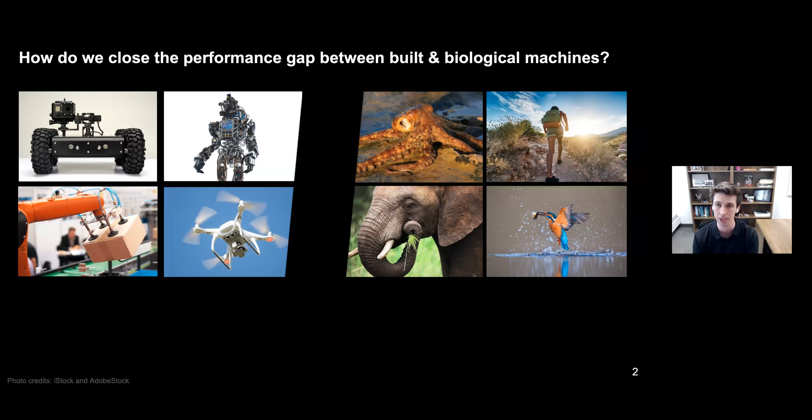If we could figure out ways of closing this performance gap, we think that we would tap into some pretty unprecedented opportunities for solving key societal and global challenges by having autonomous agents be deployable in the real world. Now, historically, there have been a number of approaches robotics has taken to try to bridge this performance gap.

We've seen really interesting and exciting opportunities in bio-inspired robotic systems and swarm robots, even thinking about going at unprecedentedly new length scales and even biohybrid designs. But we are particularly interested in this space of soft robotics, something that originally got its origins as material robotics, which places the emphasis on closing this gap not through computational advances, but rather material ones.

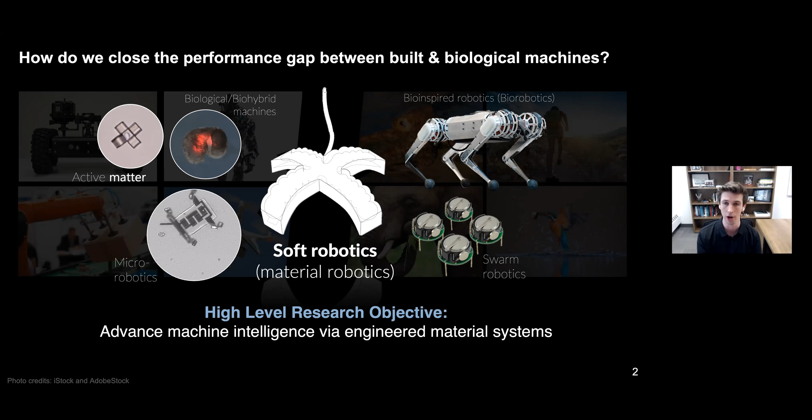I really want to drive home that our overarching research objective is rooted in material science and engineering. We do think that closing that performance gap is going to require not just computational advances, but truly materials-driven ones.

Soft robotics in many ways is bringing soft materials into the robotics design mix to appeal to a side of machine intelligence that historically has been ignored by robotics engineers. Most of robotics has been predicated on the fact that we need to think about advancing intelligence computationally, thinking about algorithmic development, thinking about control strategies, because robots have historically been systems based on motorized mechanisms.

But nature does teach us that there is something physical to intelligence. There is a role for the body, not just the brain, to play in our general sense of autonomy and intelligence. I really, truly want to emphasize that these are not new ideas.

These have been explored by phenomenal leaders. Many people on the panel know and have worked with Professor Pfeifer, who has done phenomenal work in trying to help us understand the importance of both sides of machine intelligence. But I do just want to iterate that I think this is what soft robotics aims to do.

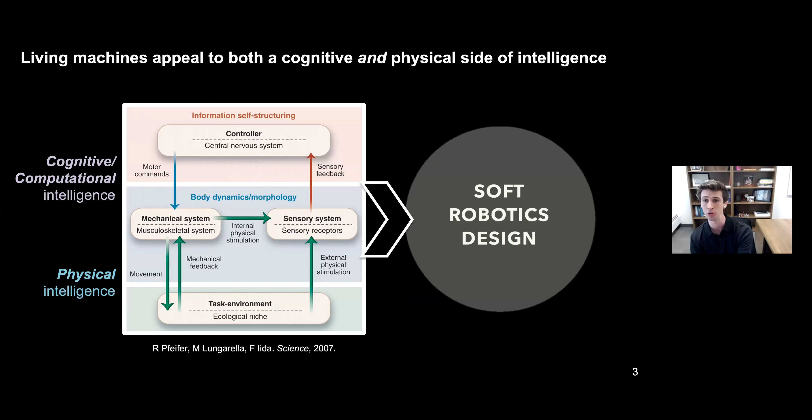I also want to drive home a point today that I don't think we do this very well at all. In fact, I want to make the argument today that we are so laser focused on just the physical appeals to intelligence in how we create new types of soft actuators or use these systems.

If you think about soft robotics, we are kind of focused on using fluidics or dielectric elastomer actuators to enable these types of physically intelligent machines. But the requirements for actually actuating these systems are not very compatible with the controllers and the power supplies and the sensors that are ultimately required to still give this robot a kind of brain.

In effect, I think in soft robotics many of our challenges stem from the fact that we have so focused on trying to create better soft robot bodies that we forgot to give those bodies brains — the types of controllers, sensors, and practical power approaches that are actually needed to create these machines.

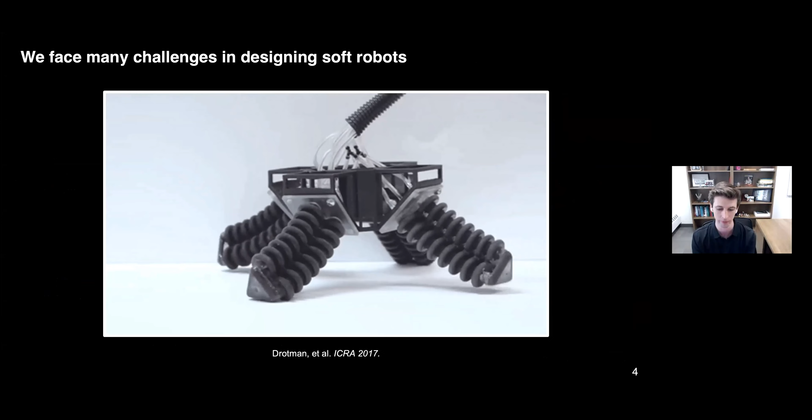You can literally see this disconnect, this lack of bridge between the physical and computational in soft robot design. This is wonderful work — I love this robot from Mike Tolley at the University of California, San Diego, where they clearly show us these beautiful bio-inspired actuation modes, but these actuators can't bear the payload of the hardware needed to actually power them.

We manufacture these systems in such a way that it kind of complicates how we might sensorize the bodies. We don't have sensors, we don't have good control strategies, we have tethers. I think many of these things very much highlight the fact that we're not doing a good job of creating physically and computationally intelligent soft machines.

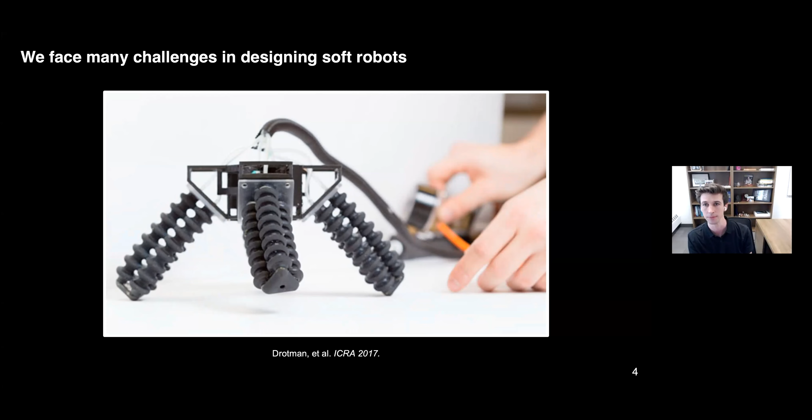To that end, our group is focused on this idea of how do we not just design soft materials for new actuators, how do we not just design soft materials for soft sensors, but how do we actually think about bringing together actuation, power, perception, and control capabilities into single material systems?

Because at the end of the day, all of these functionalities are kind of inextricably linked. And if I'm not thinking about all of these at the forefront of soft robotic design, I'm going to run into this trap of not creating a machine that appeals to both of these equally important sides of machine intelligence.

And so we imagine creating material systems that specifically work to enable these integrated multifunctionalities. Importantly, this is going to require us to take a new lens to science and engineering of robotic materials.

We are going to have to focus on new ways of processing for these integrated functionalities, because those integrated functionalities are critical for really helping us explore not only the closing of the performance gap, but practical applications for soft machines. If you're interested in reading more about how we've been thinking about this, I want to shamelessly plug a perspective piece we published last fall in Accounts of Materials Research.

The editorial board was kind enough to feature us on their front cover for that issue. In many respects, we have been thinking about robotic materials, and I want to make the case that this little system I made called the Octobot is, in a sense, our very first robotic material. This machine, called the Octobot, is something I designed in very close collaboration with my colleague Mike Wehner, who's now a professor at the University of Wisconsin-Madison, when we were in Professor Robert Wood and Jennifer Lewis's groups at Harvard University.

The general idea of this system was to think about replacing hardware by turning to a chemical fuel instead of rigid power supplies, and turning to microfluidic logic-based controllers as opposed to rigid computers. What we were able to achieve was the selective decomposition of liquid hydrogen peroxide fuel within 3D printed catalysts that would produce a gas we could use for actuation. In many ways this is an underwhelming machine, but by architecting the geometry of the plumbing within this elastomeric composite, we are able to showcase a composite that integrates actuation, power, and control simplistically within a single composite.

Many groups are now working on thinking about fluidic sensing in these types of systems. I want to hint today at where we are actually going forward, inspired by the Octobot as a first artifact of a robotic material.

Specifically in my group, we think that the best way of bringing together all of these important robotic capabilities is through returning to electronically integrated approaches to how we think about actuation, control, sensing, and also power. This motivates why we think electronic integration is the way of the future in this space, as opposed to something like pure fluidic integration approaches.

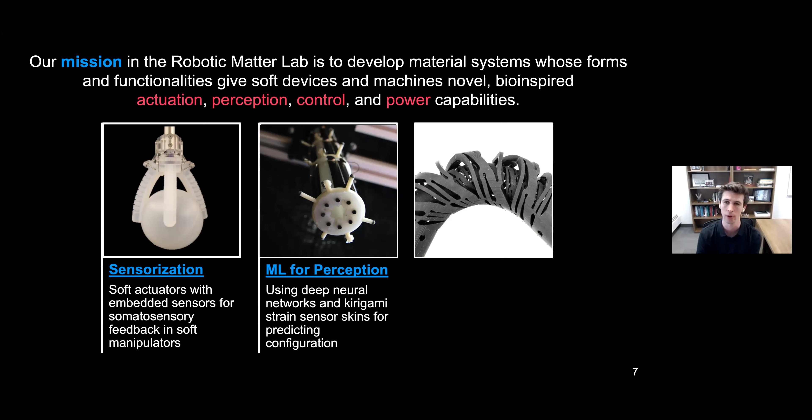I want to talk a little today about how we have thought about sensorizing soft robots, specifically creating new types of sensorized soft actuators. Control in soft robotics is incredibly hard, not only because of the challenges of sensorizing soft robot bodies, but at the end of the day, what do you actually do in a feedback context? How do I actually control a very difficult to control system? I'll talk a little bit about how we hope to bridge that gap with machine learning.

Finally, I want to tease something of huge interest to our group right now at Northwestern, and that is thinking about returning to electric actuation, not through high electric fields or thermomechanical response, but literally creating new types of architected materials that would allow us to return to the use of conventional, robust, easy to access servo motors. So I first want to dive into this sensorization side.

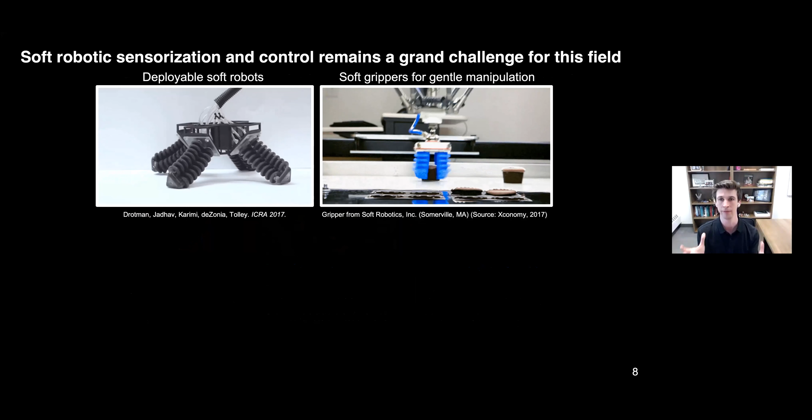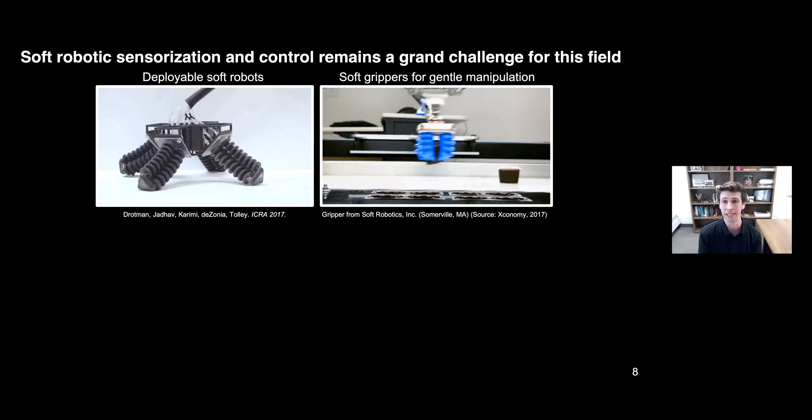Again, in this idea of appealing to physical intelligence, working towards pneumatic actuators or dielectric elastomer actuators, we've created materials and manufacturing methods that make it difficult to easily sensorize these robots. Most soft robots that you see actually don't have any sort of integrated sensors, and we don't have good closed loop control strategies for these robots.

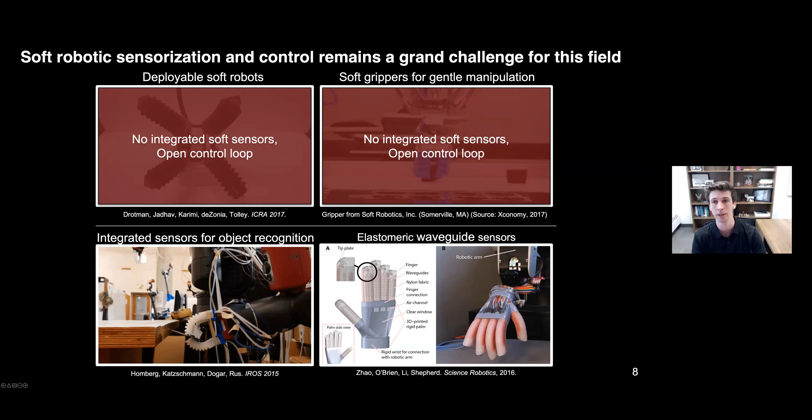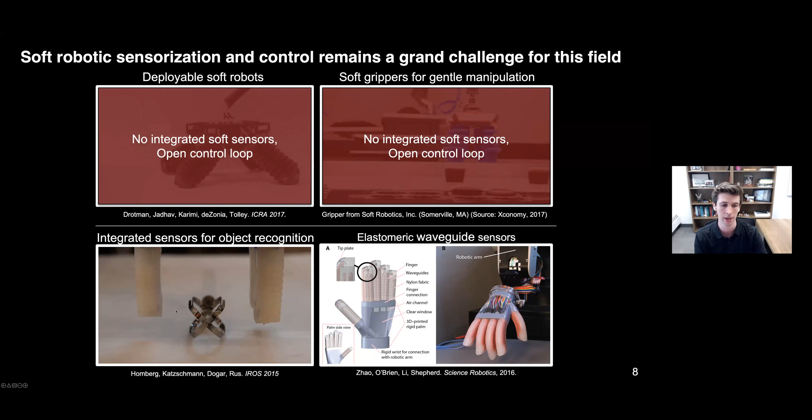When we started this work, some of the prevailing strategies were to figure out ways of carefully molding off-the-shelf flexible bend sensors within the neutral axis of pneumatically actuated fingers. This is work from MIT, from a former colleague of mine, Robert Katzschmann, and my postdoc advisor, Daniela Rus, where they were able to hold objects and in a preliminary way predict or recognize what object was in the soft hand's grasp. I'll talk later about some other sensing approaches.

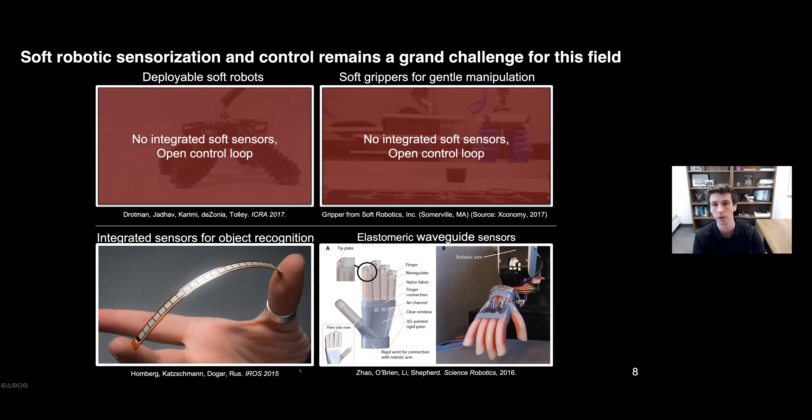I do want to give a highlight to Professor Robert Shepherd's group and the incredible work they're doing with elastomeric waveguides as sensors. The idea here is to sensorize soft actuators by putting in stretchable waveguides that allow us to translate optical power losses during their deformation into modes of sensory feedback.

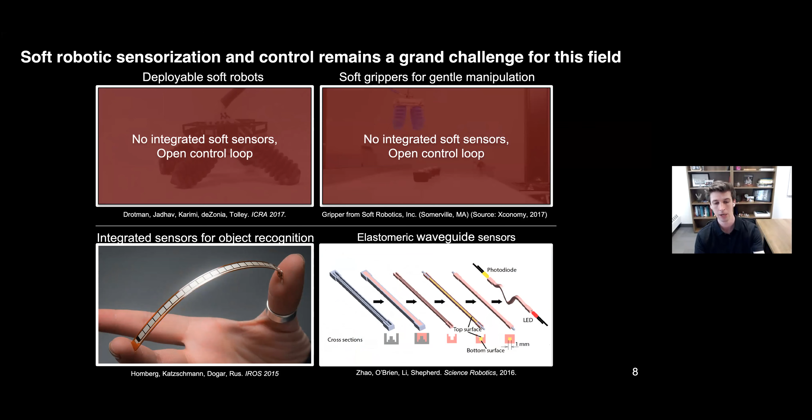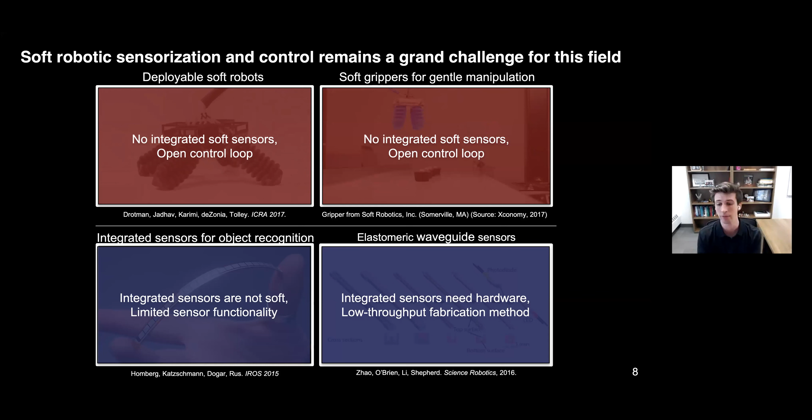The big takeaway I want to emphasize is that in some instances these types of sensors aren't exactly soft. Bend sensors can bend, but they're not stretchable. It's difficult to design these systems easily when you have to manually assemble or manually mold and place them into actuators, resulting in limited design flexibility, limited softness, and ultimately limited functionality.

We made the Octobot with a technique called embedded three-dimensional printing, which I'll talk more about in a few slides. As we worked on Octobot and recognized the opportunity of freely patterning different functional materials within the body of an agent, we wanted to work towards a system that wouldn't be limited in how we might bring specialized functional sensing networks into soft robots.

Specifically, we wanted ways of sensorizing soft robots that would let us explore how an agent might have proprioception, specialized forms of touch, or even pain or temperature sensing capabilities. We didn't want to be limited in the somatosensory capabilities we could explore, so we set out to create systems we call SSAs, or soft somatosensitive actuators.

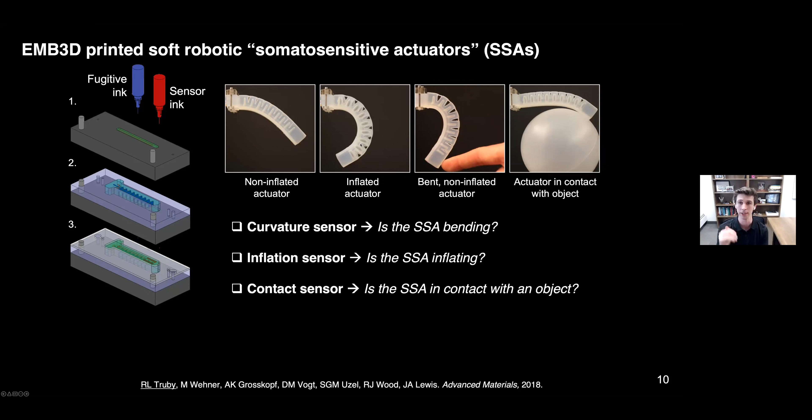I also wanted to know whether this was intentionally inflating. I can inflate the actuator to get bending, but I can also manually bend it to get bending, so it's important to sense if that was intentional. We also want these objects interacting with the real world, so sensing contact was very important too. We set out to introduce within this printed soft somatosensitive actuator at minimum three different types of sensors: curvature, inflation, and contact sensors.

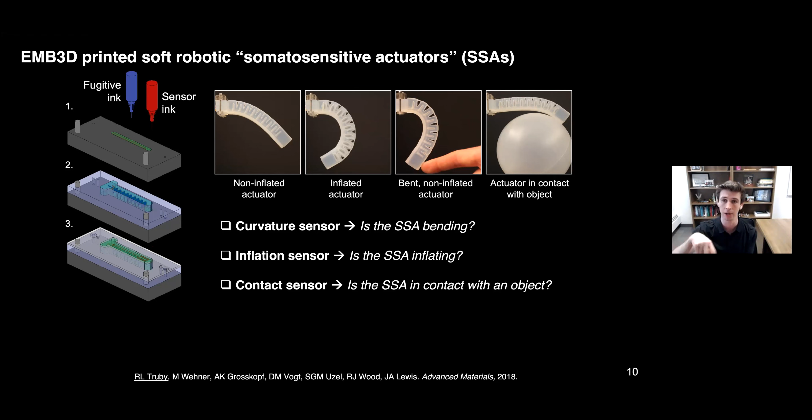I'll talk more about embedded printing with a short video clip. The premise is I have some mold, and within that mold I fill an uncross-linked silicone, rheologically tailored fluid called a matrix material, which lets me freely print different traces of inks to give functional parts. For this work we use a mold assembly: take one layer, pour matrix material in, print whatever's in that layer, then add a new matrix material and mold layer, pour that in, print, and continue the process.

For this work we use two functional inks. First, a fugitive ink—these are ubiquitous in Professor Jennifer Lewis's group, aqueous gels based on a class of polymers called pluronics. We use this to template out our actuation networks. But really what we needed to do was figure out how to 3D print the sensing ink, which is the red ink you see here.

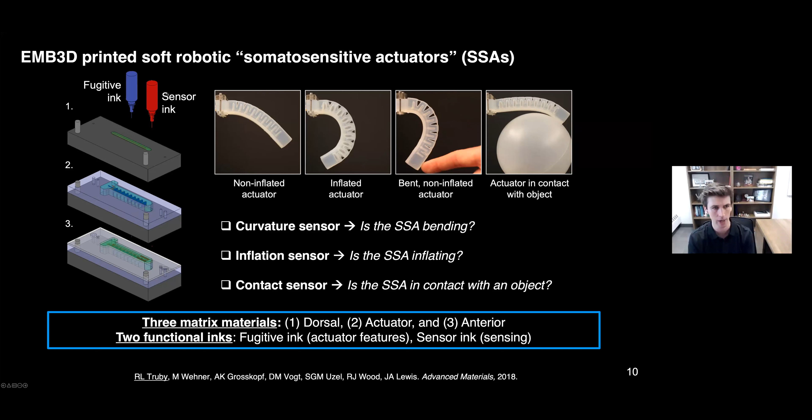I don't have time to go into all the trade-offs of making a better soft sensor—soft sensors are difficult to create—but we turned to printing sensors based on ionic liquids, naturally ionically conductive fluids. We started working with this organic ionic liquid, a molten salt at room temperature called 1-ethyl-3-methylimidazolium ethyl sulfate.

Anytime we're 3D printing, we need to rheologically tailor the ink to facilitate the printing process—we need shear thinning, viscoelastic behavior. We found the easy way to do this was to take fumed silica, a very cheap rheological modifier, add it to our ionic liquid, and get these really nice shear thinning fluids.

Fortunately for us, this had been done before—people had looked at solid and gel electrolytes, seeing what happens when you put a nanoparticle into an ionic liquid and get these nice gels. This was probably the easiest ink I had to make during my PhD: literally taking fumed silica and adding it to an ionic liquid to get this high performance, soft, ionically conductive sensor.

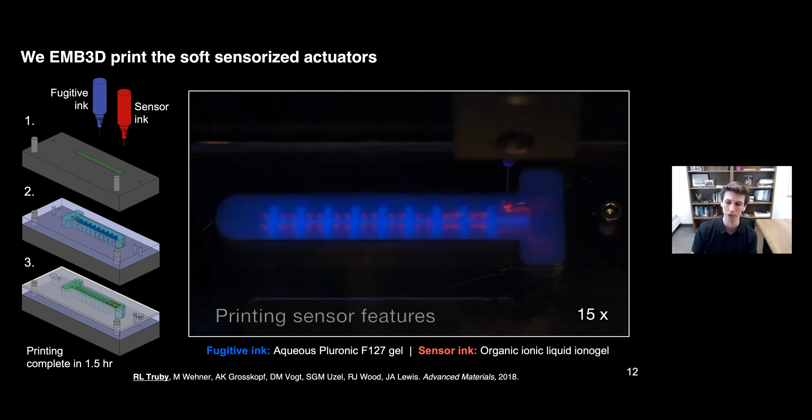This quick video will show you a bit about the process. The entire process takes about 90 minutes, but this is us printing the pluronic ink within that actuator matrix. We'll then put that third layer on, our third matrix material, and this is that sensor ink being printed. Again, all of this is uncross-linked, and we print in a free-form way. Once printing is done, we throw this in the oven and we're left with structures that look like this.

The fugitive ink can be removed by just refrigerating the actuator and pulling that ink out by vacuum. But in short, what we have here is in 90 minutes, an opportunity to create a 5-material construct that would be very difficult to do with any existing method. We achieve this by using the mold to globally program form, and then we print 2 different inks to give all the different functional features we need.

In this particular picture you see on top, this is the curvature sensor running along the top or dorsal side of that actuator. The blue features are again that pluronic ink, which form my actuation network. You can see the inflation sensor weaving right around that set of actuation bladders. And if I turn the tip over and show you the underside, you'd see this contact sensor meander, which is where we make contact with objects.

We can tune the mechanical properties of each matrix material, and we can terminate all the leads and inlets for our sensors and actuation network within this tougher actuator matrix that you see here.

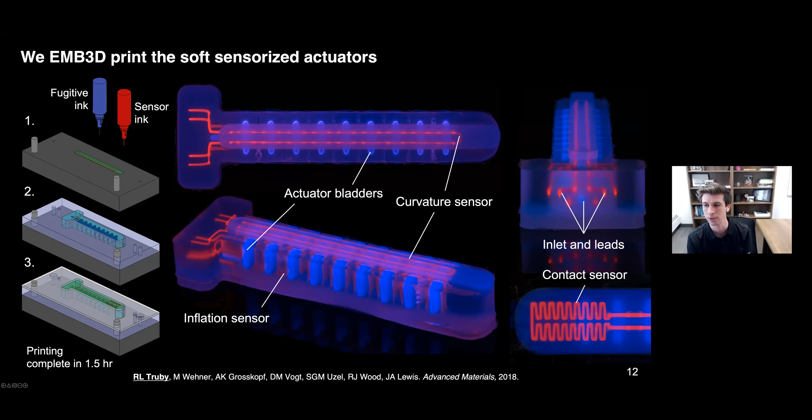I want to quickly walk through how these sensors actually perform. To do that, I'll give you this simplified view of these actuators. All the inflation, curvature, and contact sensors are resistive sensors. The inflation sensor is shown here in green in the actuated state, and on the bottom in the unactuated state. That inflation sensor weaves around the inflation bladders, or actuator bladders, so as I inflate or increase internal pressure, I compress my inflation sensor and get a resistance increase.

The curvature sensor lies on top of the device, so as I inflate, I bend and get a resistance increase. Similarly, on the bottom side where I have my contact sensor, if I apply contact pressure, I collapse cross-sectional area and get a resistance increase.

Fortunately, that's exactly what we saw. These were designs that we intended and were able to see in our characterization of free and block displacement of these actuators. On plot A here, we're taking that actuator and just allowing it to inflate without hitting an object. You can see a nice resistance change with inflation pressure from our blue curvature sensor, a nonlinear response from the inflation sensor, and no real big resistance change from that contact sensor.

Now, if I change the study by having some rigid obstruction and freely inflate against it, I'm going to constrain bending, so I don't get as pronounced a response from my blue curvature sensor. The green inflation sensor is pretty much the same, and that orange contact sensor begins to show clear resistance changes. In these block displacement studies, we're not guaranteeing pure intimate contact with that meander, as shown in this illustration, but if I directly push on that meander, I get very large resistance changes from that contact sensor.

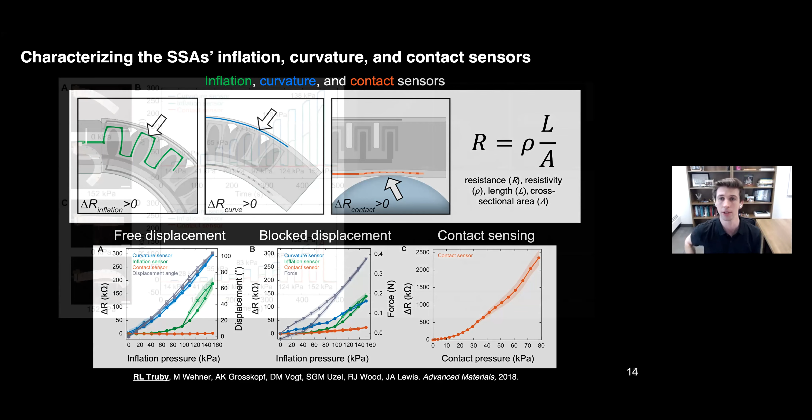Really interesting was when we'd flick and perturb the system. You could literally sense that damped harmonic response as it would go back to its steady state. In this paper, in the SI, we have these beautiful curves showing the high resolution of that sensing. That's something you simply wouldn't achieve with other types of soft sensors that are hysteretic or time varying.

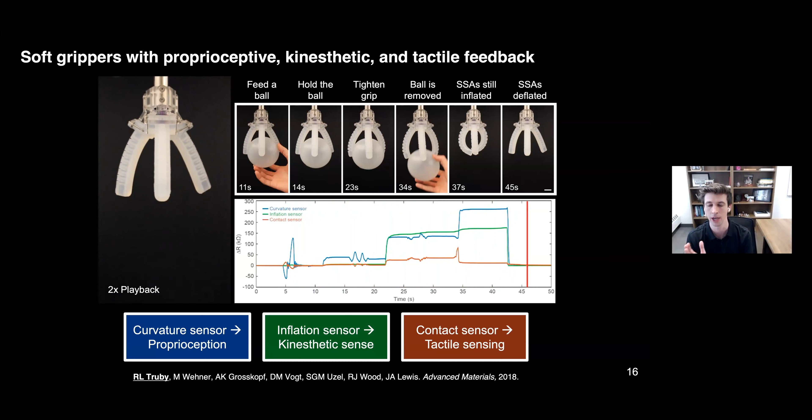This video shows you a little bit about how these curvature, inflation, and contact sensors can give rise to bio-inspired ways of proprioceptive, kinesthetic, and tactile sensing. This is just me interacting with the gripper, holding a ball. Importantly, when I fully deflate this actuator at the end of the study, more or less all of those sensors go back to their original resistance value. That kind of robust, reliable performance is really critical for thinking about control.

So when I moved to MIT, I really wanted to close the control loop on a very simple gripper. I wanted to create algorithms that would allow us to autonomously grab objects with these grippers.

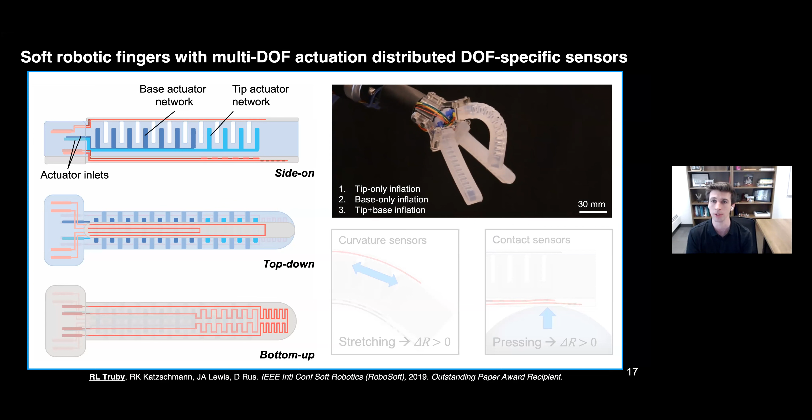One of the really cool things about embedded printing is, of course, if I want to change the general shape, I have to change the mold, but otherwise I just change the G-code and the path planning for my actuator and sensor inks. So instead of just one actuation network, I could have two different actuating networks, which would allow me to selectively actuate either the tip or the base of my finger. This is something that's kind of hard to do when I take a pure molding approach to creating pneumatic actuators.

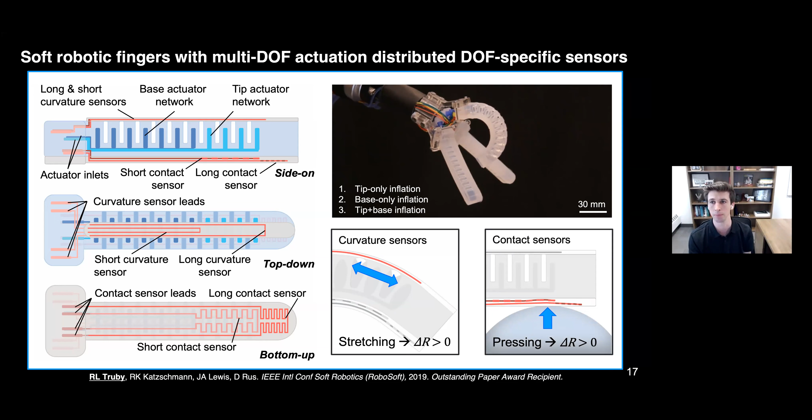What was really exciting about this was I could also create regionally specific curvature sensors. So I put one curvature sensor called the short curvature sensor spanning along the base actuator, and I could have a long curvature sensor that spanned the entire length. I could similarly create short and long contact sensors. In short, I could create multiple degrees of freedom of actuation, and each of those degrees of freedom had its own curvature and contact sensor—so truly distributed proprioceptive and tactile sensing.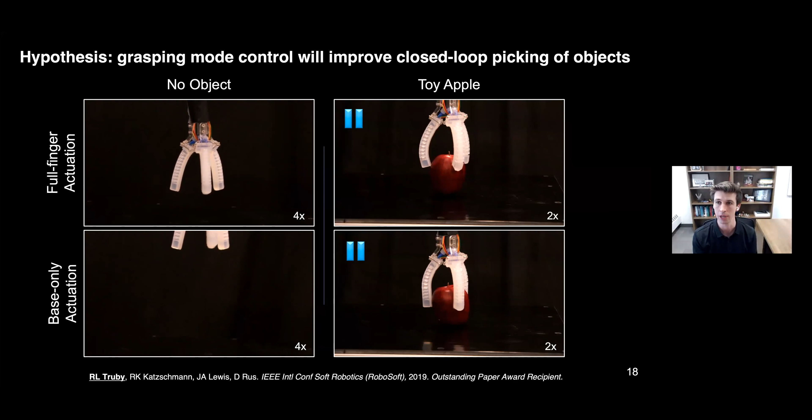I don't do anything—the algorithm naturally positions the hand further down the object, so that when the algorithm tries to initiate a grasp, it has autonomously postured its hand further down the object, giving me a more successful lift up. And so without changing anything, I can look at this with a bunch of different objects.

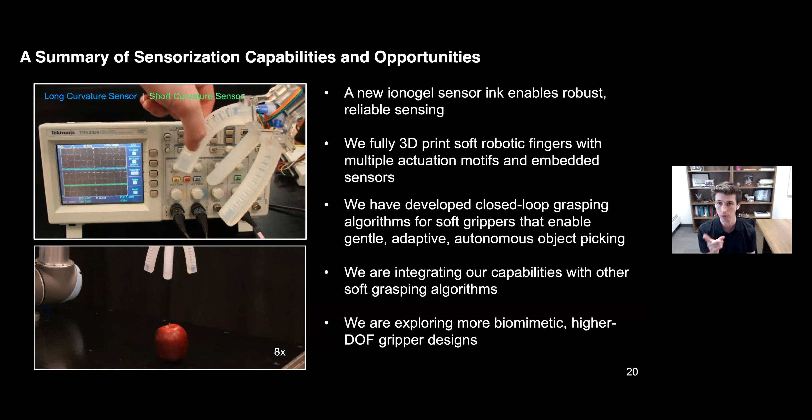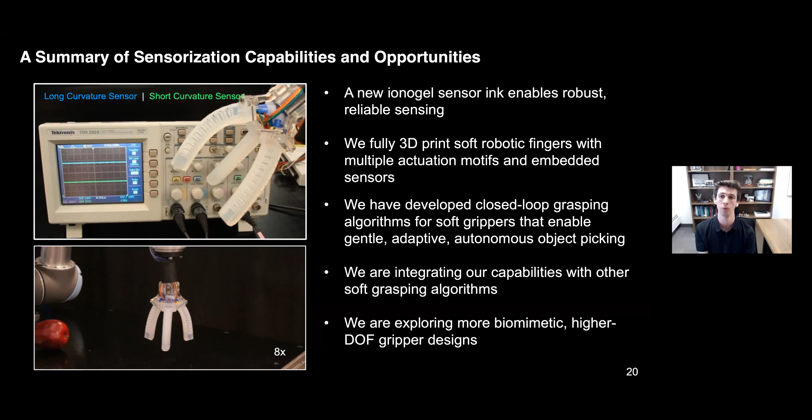So in short, I wanted to show you this because we're looking at new ways of sensorizing soft actuators that are fully 3D printed. We have now created 2 degrees of freedom in actuation with 4 distributed sensors in one 90-minute print session. We've developed some basic algorithms for autonomously feeling for and posturing our hand around objects before grasping them. In short, we now have a lot of opportunities to think about how to better control these things, how to think about more bio-inspired actuation, and a whole lot more.

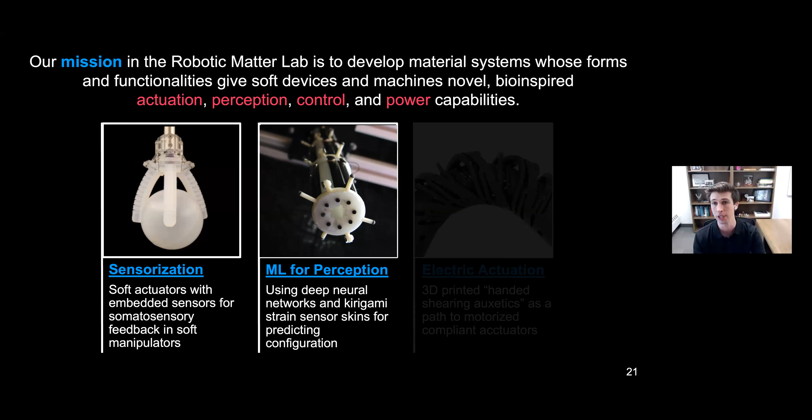These types of algorithms are great. They're simple, and they allow us to do really cool things. But in the context of more robust control, what we're realizing is that we have to turn more and more to machine learning. And the reason we're turning to machine learning is that model-based control of soft robots is incredibly difficult.

To me, this is one of the coolest soft robots out there. This is work from former colleagues of mine, Robert Katzschmann and Cosimo Della Santina. This is an elephant trunk inspired arm—a 3-segment arm where each segment has 4 pneumatic actuators. They developed this very complex model-based approach for dynamically controlling the motion of this arm.

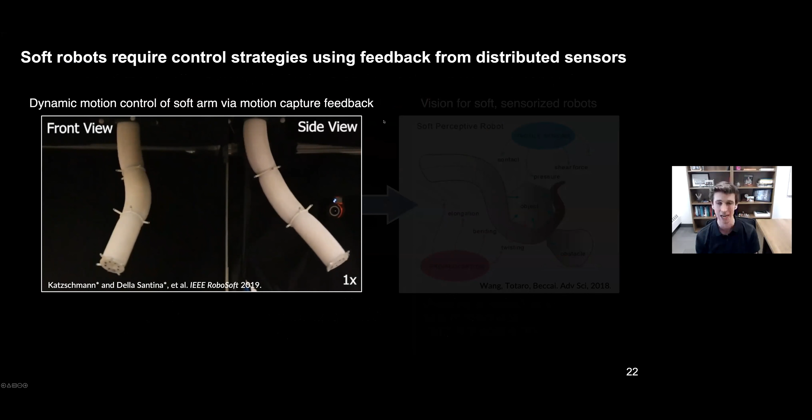But unfortunately, that arm actually has no sensors in it at all. It's using motion capture, which is a kind of exogenous vision-based sensing strategy. As soon as I want to ask this to work in the real world, it's going to say, well, where's my camera showing me how I'm moving? If you want to actually robustly control a robot, we need to figure out right now how to integrate specific tactile and proprioceptive sensors within these bodies, so that our control strategies aren't using motion capture.

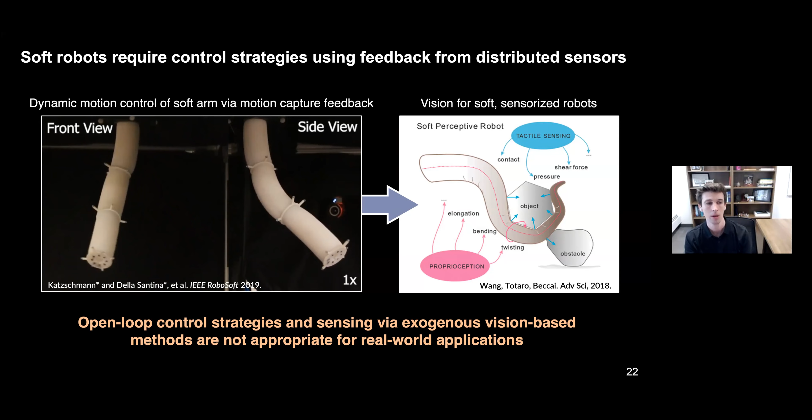They are working with the distributed sensors that we could provide these bodies. Machine learning has a critical role in helping us understand how to make sense of these sensors.

We've seen really awesome work on how machine learning could help us predict something about the deformation mode of soft actuators that are sensorized with liquid metals. Rob Shepherd's group, again, doing really interesting work predicting shape change of non-actuating structures with their optical waveguides. And then again, really great work coming out of UCSD and Mike Tolley's lab, where they're taking piezoresistive sensors and recurrent neural networks, specifically LSTMs, to predict tip position and force in bending actuators.

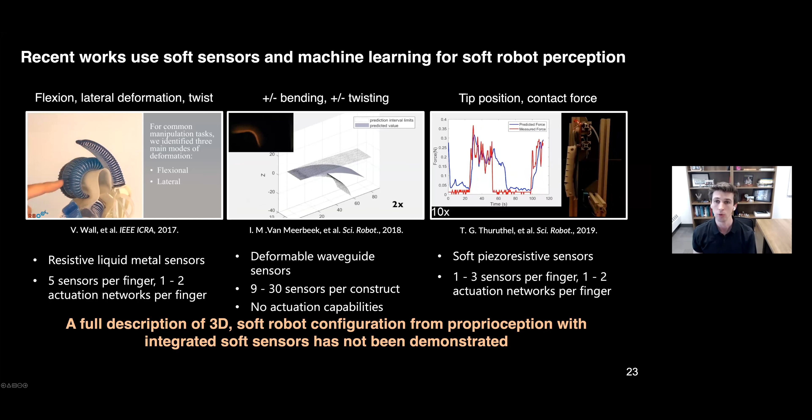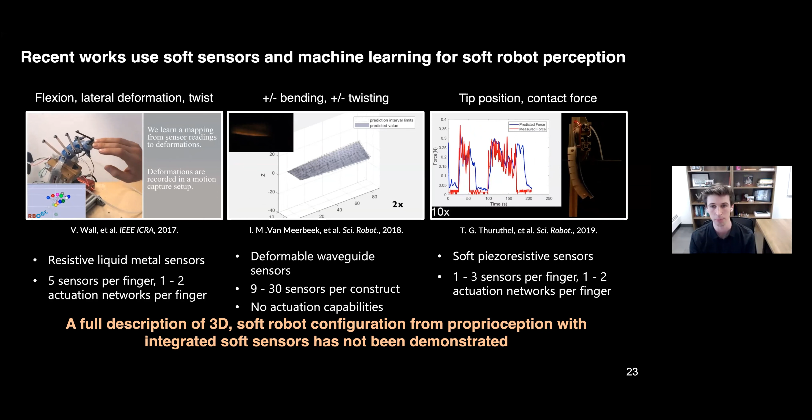In short, we still don't have the ability to predict the full configuration of a soft robot if we want to do that type of dynamic motion control that I showed previously. And while there has been a lot of work in this space, this is still kind of a key missing need, and something that we were very much inspired by.

So we took this same arm and decided, well, let's figure out a way of easily sensorizing it. It's very difficult, as I hopefully alluded to in the previous part, to sensorize very complex robots.

We had this very complex elephant trunk inspired arm, and we needed a very easy way of sensorizing it. So I'll talk about how we do that with Kirigami and off-the-shelf sensors. These sensors are going to be inputs to neural networks, and using motion capture data as ground truth, we train these neural networks to take sensory inputs from these sensor skins and convert it to a prediction of configuration. I'll talk a little about this pipeline and the challenges we face.

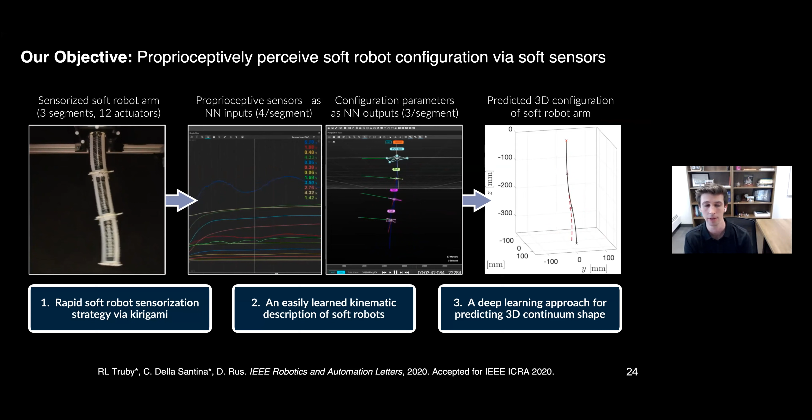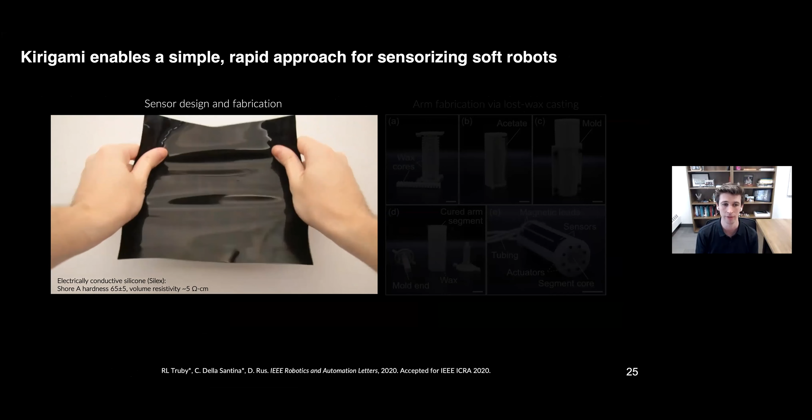I showed you previously this very complex 3D printing method to sensorize soft robots, but an arm like this is really difficult to 3D print. It's difficult to sensorize. So we reached for off-the-shelf conductive silicones. These are commercially available, and we were able to fabricate these easily through laser cutting.

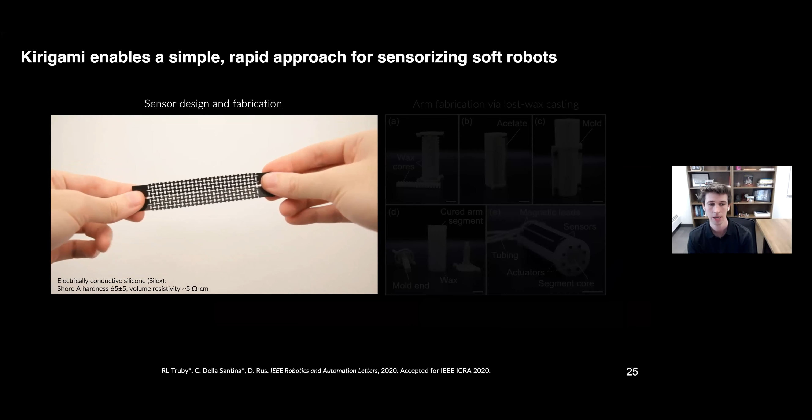We decided, let's take on some Kirigami designs. Through the cut pattern, I can change the sensitivity, the response, the extensibility of these systems. We started putting them on the sides of these arm segments. We worked with 4 different patterns that we'd call circle 45, -45, 1D, and 0/90 patterns.

We could take these 4 different sensors with different responses and lay them over the molded arm segments we were making. Importantly, the model that Cosimo and Robert had developed is very much dependent on the form and the mechanical properties of this arm. So we didn't have to change anything mechanically or from a design perspective about that arm. We were able to conserve that design and simply plasma bond these kirigami surfaces to that surface.

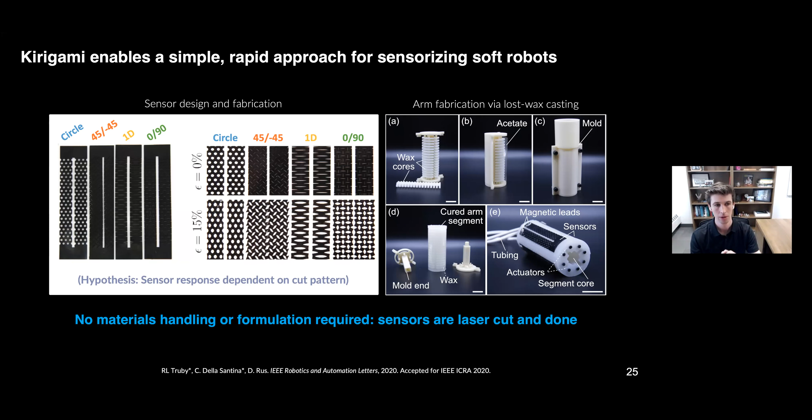So this is the fully sensorized arm. Again, it's 3 segments - we call them segments 1, 2, and 3, with segment 3 being on the bottom. You can see that kirigami sensor skin on the outside.

Many of these types of robots, and the way Cosimo and Robert had been modeling these, were through piecewise constant curvature models, which are typical for different types of continuous robots. Effectively, a PCC description for this robot allows me to define for each segment some curvature and some pair of angles describing that orientation in space. So if I can understand what inputs are going to my system, and use the PCC description to kinematically describe my robot in configuration space, then I can understand something about what this robot is doing in task space - its position or orientation.

Cosimo had developed this really wonderful framework for helping us think about where sensors would be useful and helping us predict these different configuration parameters for this type of arm.

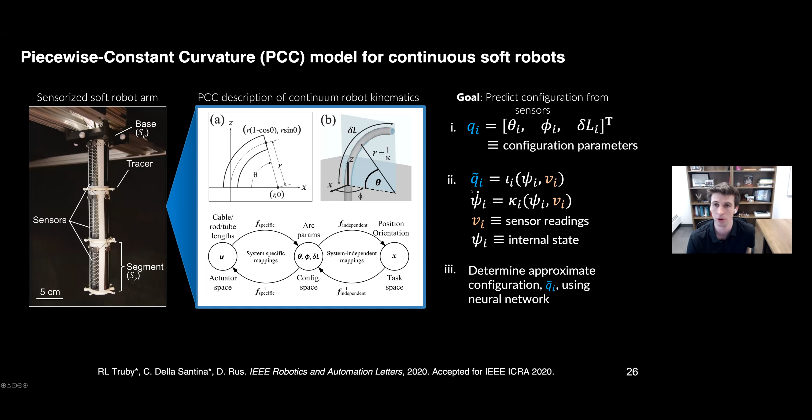What Cosimo and Robert had normally done was try and work with these 2 angles, describing the orientation of these segments, and some curvature delta L. We would have to predict these for each segment, so Q sub I would be for each ith segment. What we really want to do with the neural network is figure out how to take the sensor inputs V sub I, of which there are 4 per segment, and back out with a neural network what our kinematic parameters are.

As we started working on this project, there's a big problem we were faced with: these particular kinematic parameters are not good for learning. I run into singularities, as is common with PCC descriptions, for how I think about theta and phi. If I don't have any curvature, then I can describe any phi that I want and still have that description in place.

So we really had to think about ways of extending the PCC description to a learnable subset of kinematic descriptions. I'll gloss over this a bit, but in short, we can take these same geometric considerations and back out 4 unique lengths describing each side, if you will, of the segments. We call these L sub 1 through L sub 4 for each ith segment. We can algebraically describe 2 condensed terms, delta x and delta y, and these are what we're substituting in our prediction. These allow us to avoid those singularities and actually have parameters that are learnable.

What you see here is that third segment actuating. We see our sensor responses for each mode of bending each actuator and our corresponding kinematic responses.

This is very noisy. It's difficult to comb through and understand, but the big takeaway is that these sensors are non-monotonic. They're not very good. We're stuck with the same challenges of soft sensors. We can't use those ionogel sensors we had made previously. We're having to work with these typical time-varying hysteretic sensors, and you can see it's difficult to do anything from a model-based perspective with these non-monotonic responses.

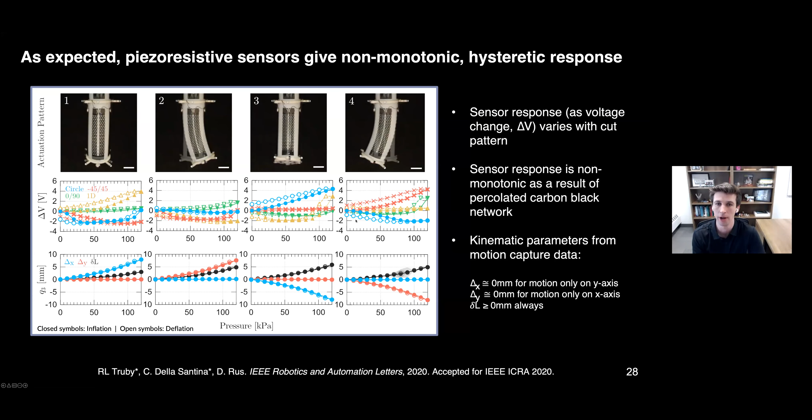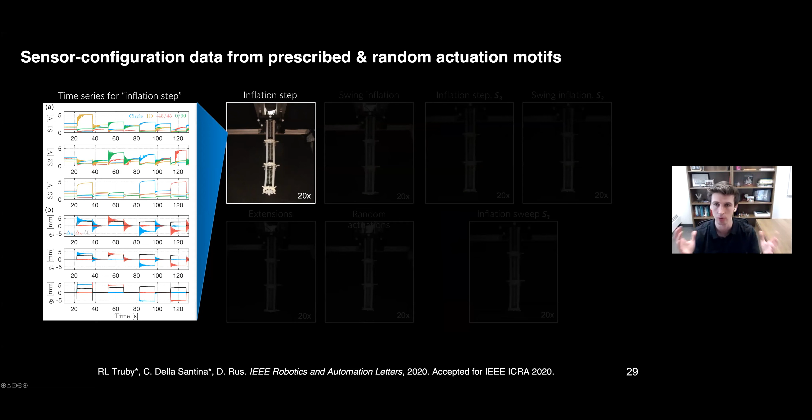This gives you a sense of what these experiments would look like. We're looking at all sensors here as a full arm undergoes what we call these inflation steps. We would run these experiments in motion capture, creating huge data sets of sensor responses versus motion capture, and we had to run these arms through a variety of different actuation motifs just to try to capture as much of this time-varying response as we could.

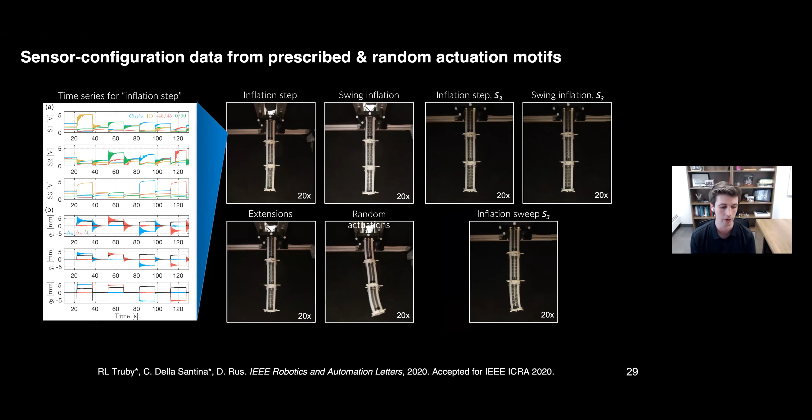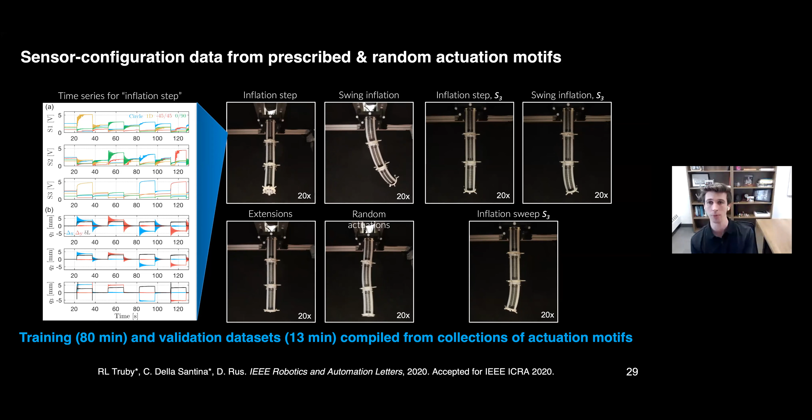To bring this to a short message, we were only able to collect about 80 minutes of training data and 13 minutes of validation data before this entire arm would fail, and we'd have to repeat the whole training again. It's pretty common practice to take your validation set and use that as a test set in these kinds of projects, and unfortunately we did have to do that, but we were still able to make some important insights into this type of work.

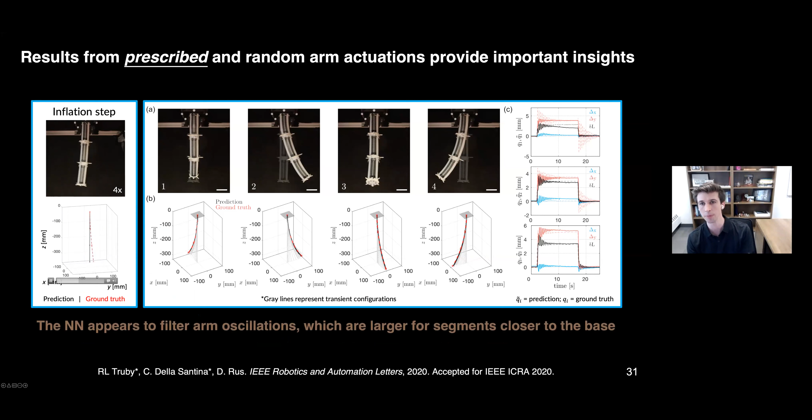Very quickly here, what you can see in the video is that prediction alongside the ground truth. The prediction is the black line that you see here, and the red is the ground truth. What you can see from this response is that the neural network is helping us predict steady state really well, but we are seemingly filtering out some of the more dynamic responses of the device.

These are some predictions from random actuation. So we apply random pressures at all 12 actuators and hold that for 3 seconds. Again, you can see here in the video where we're showing prediction and ground truth that we are filtering out that dynamic response.

It's interesting to us where the contribution lies for not being able to fully predict configuration dynamically. Does that lie with the materials we're using, or with the neural network design? In short, we had to put a lot of work just to use machine learning to help us perceive for such an arm.

Really our longstanding goal is to figure out how do we take this type of arm and how do we now dynamically control using those sensors as feedback, not just the motion capture.

So in the interest of time, I'm going to move on quickly onto this last part. This is work that came out last year. We're really excited about it, and it's looking at a very different approach of soft robotic actuation.

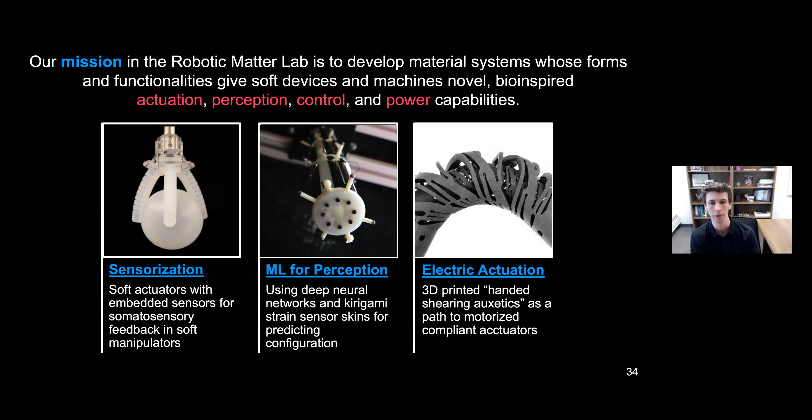One of the themes I hope has shined through is that actuation is tough, and actuation, especially pneumatically, has a number of challenges, in large part because we need bulky, rigid hardware to actually actuate these pneumatic systems.

There are a number of ways people are trying to move beyond pneumatics, specifically in an electrically driven context. One way is through joule heated actuation, thinking about using things like liquid crystal elastomers, running a current through these, and driving electrically controlled motion. The big problem with any joule heating actuation strategy is that this is not very efficient, and these mechanisms are very slow.

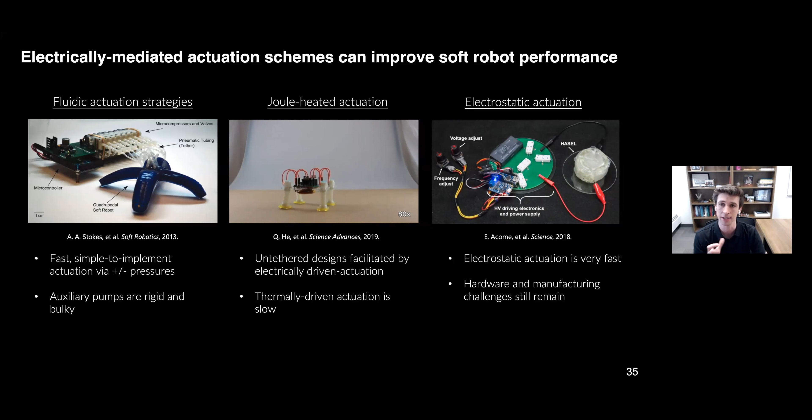We can also turn to electrostatics, things like DEAs or HASEL actuators. These are great because they are incredibly fast. I get very high actuation bandwidths, but I still need all of that rigid, bulky hardware to drive the large voltages required for their actuation.

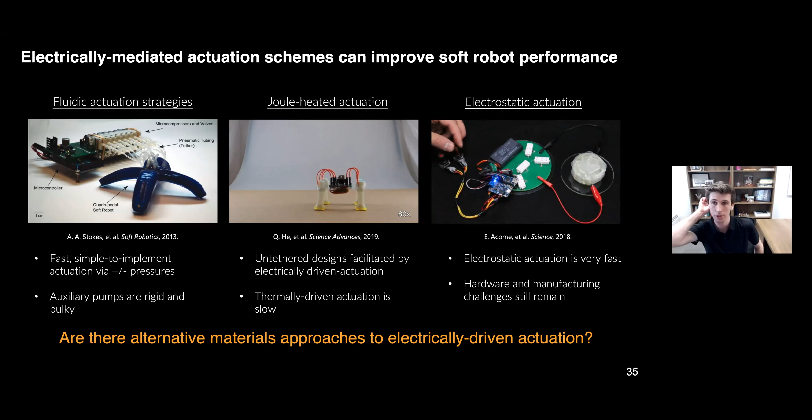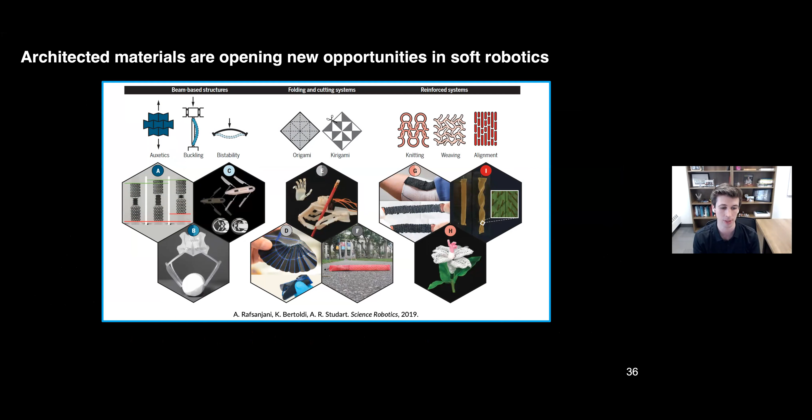So for us, we have been interested in what other materials opportunities we have for approaching ways of electrically actuating these robots. For a number of reasons, architected materials should be inspiring ideas within this space of soft robotics, and for us in particular, we have been interested in ways of thinking about auxetics for actuation. The big problem, though, is that in most of this space, there are bespoke design and manufacturing methods for all of these types of architected materials.

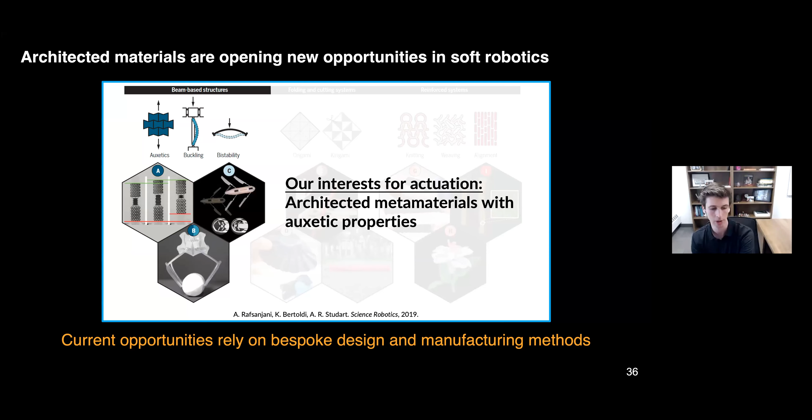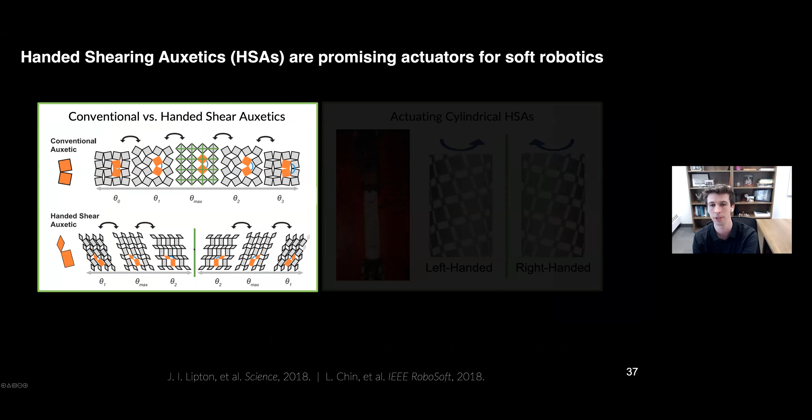It'd be great to find ways of streamlining the design and fabrication of these complex architectures. So a colleague of mine, Jeff Lipton at MIT, had started working on a new class of auxetics called handed shearing auxetics. And unlike conventional auxetics, which have this symmetric auxetic angle, handed shearing auxetics have this chirality to them, which allows us to think about ways of interestingly coupling rotational movement with extensional motion.

And what that allows us to do is actually conceive of ways of driving shape change with servo motors. I actuate or rotate one end and drive displacement of the other.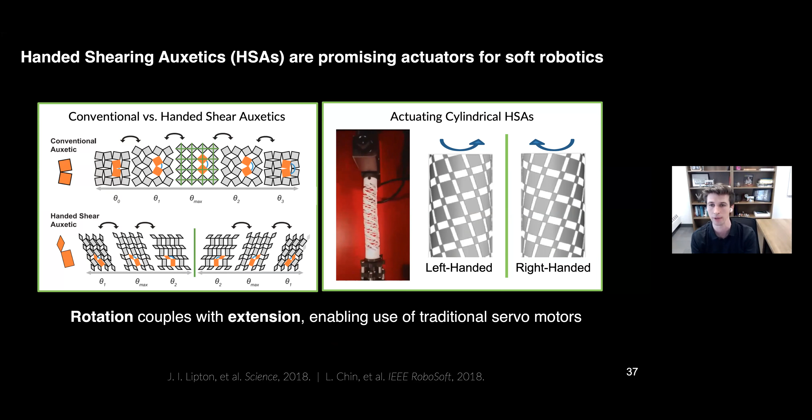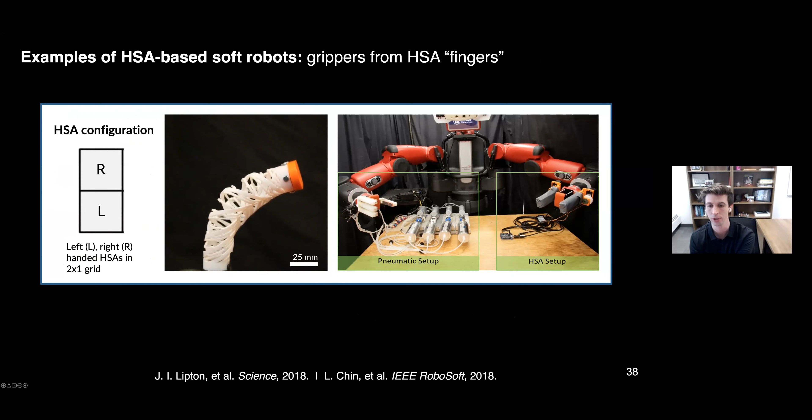One of the big opportunities we see is that if I'm driving these types of bending actuators or complex actuators with servo motors, I get to replace this whole pneumatic setup with something very streamlined and simple. I get to return to electronic power, low form factor of servo motors, and I can work with traditional components rather than the gigantic infrastructures otherwise needed.

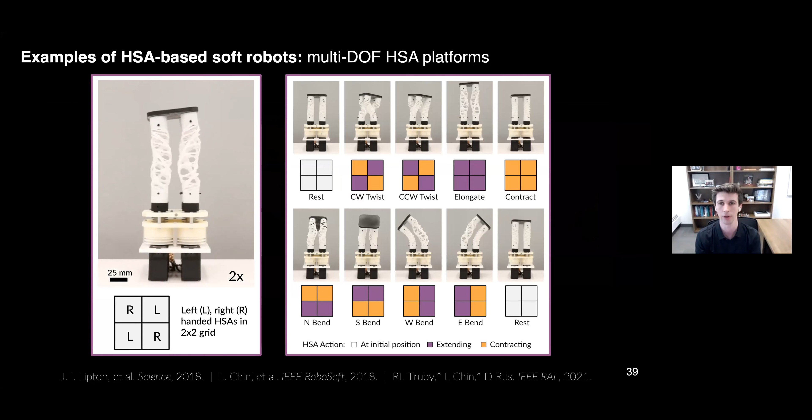This is another type of system you can design, not just a bending actuator like you saw, but a kind of platform with multiple degrees of freedom. By changing the rotation angle of my servo, I can get very complex shape changes that would be difficult to achieve with pneumatic systems or other types of actuators. You can see this extending, compressing, bending, twisting—very complex actuation, all through servo motors.

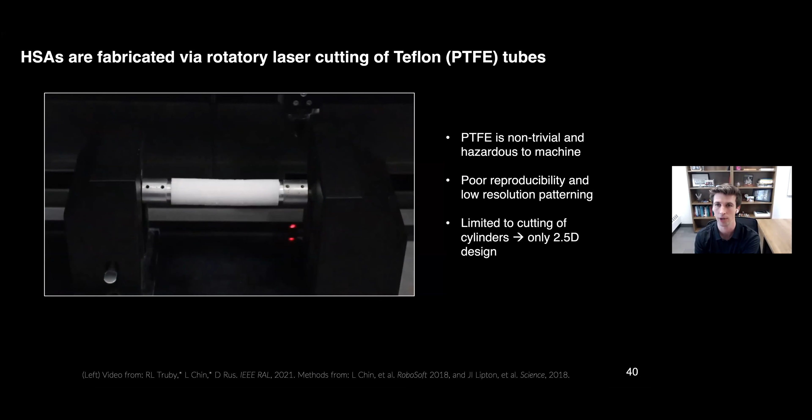The big problem with auxetics is they're kind of limited to how you achieve that architecture. For the HSAs, we use Teflon because of its high strain at failure, and we had to make these HSAs through rotational laser cutting, which is not a great reproducible process. It gave rise to a lot of reproducibility errors, and we were really trying to think about ways of moving beyond this very limiting manufacturing approach.

So in my last year at MIT, I was able to bring in a Carbon M1 printer, where we started using the proprietary resins from DPL and Carbon to actually create these types of architected motorized structures.

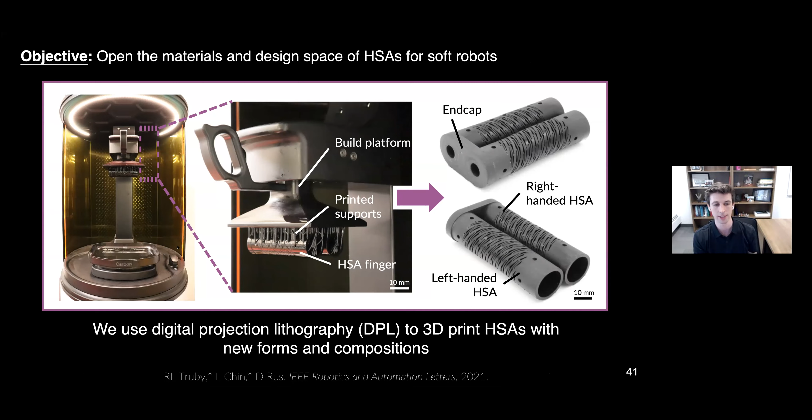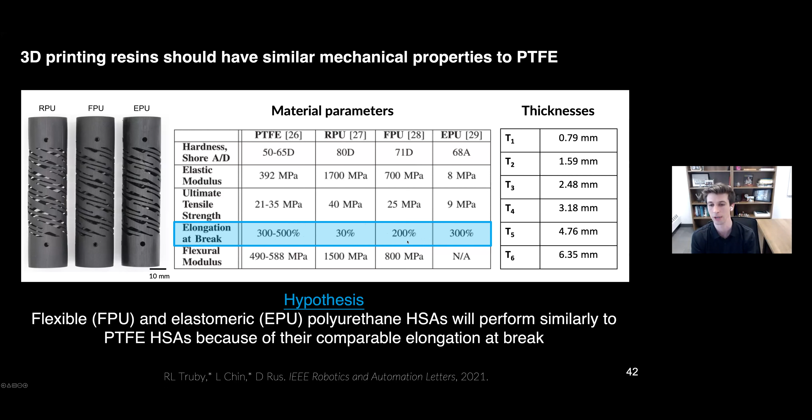Very quickly, it's this elongation at break that allows us to have these living hinges within these auxetic materials. Teflon has elongation at break that is incredibly high, 300 to 500%. We had a couple of different polyurethane-based resins we were interested in using from Carbon—specifically their FPU or EPU resins, which stand for flexible and elastomeric polyurethane.

Without going into too much on the characterization, what we were able to see is that qualitatively, we saw similar performance, which was really exciting. So instead of laser cutting these, we can now print them from a couple of different materials, not just Teflon, and we do see some nice similarities in their behavior. The EPU is very soft though, so you can see these kind of weird buckling behaviors at large deformations.

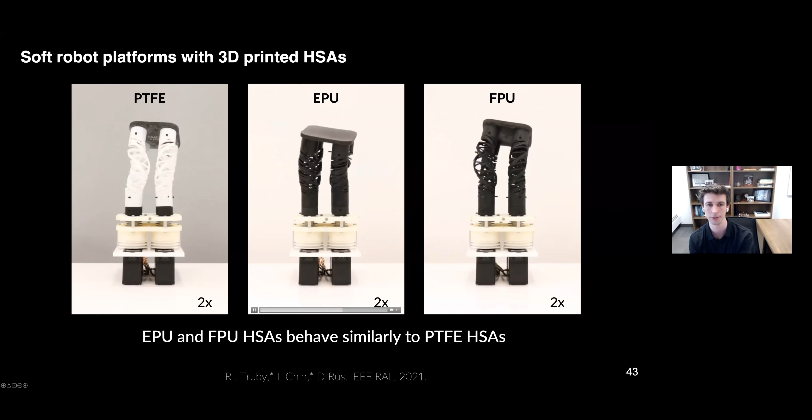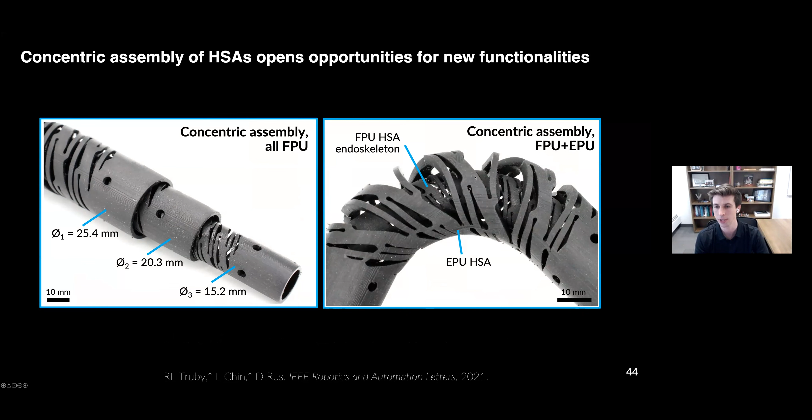You can do some really interesting things too—we're not limited to one tube and laser cutting. We can create concentric assemblies, and we can think about combining rigid endoskeletons surrounded by flexible exoskeletons. So we wanted to showcase what some of those opportunities might look like.

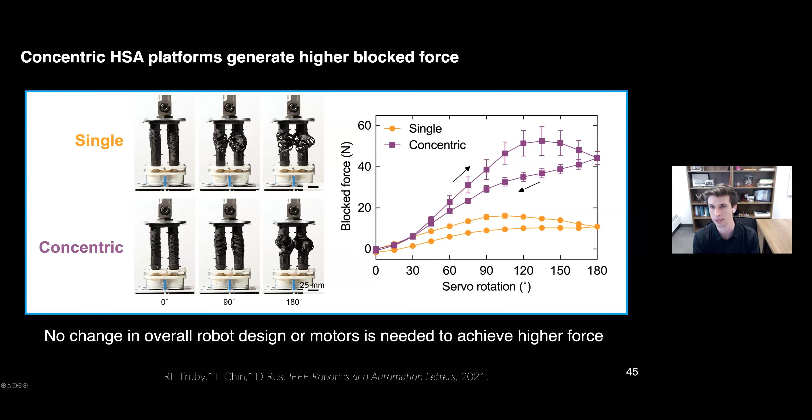This is one of these multi-degree-of-freedom platforms. All we did was simply nest concentric HSAs, and from that get a much higher block force without really compromising the servos in any way. Looking at blocked force here, you can see these concentric HSA assemblies give a much higher force given servo rotations.

We also wanted to compare from the bending point of view how the performance of FPU would compare to something like Teflon. So we made these bending fingers and created a setup on an Instron where we grasp around an object and see what force is required to pull that object out. You see here Teflon fingers, our flexible polyurethane fingers—these very soft, compliant, floppy elastomeric polyurethane fingers—and then these hybrid designs.

What we see from the grip force analysis is that Teflon and flexible polyurethane perform quite similarly, which is good to see. The EPU really is too soft to generate much force at all. Very interestingly, even though the hybrid design isn't bending as much, that rigid endoskeleton does give us a way of thinking about having higher grasp force. So for this particular design, we are seeing what we can do with greater torque servos and optimized designs.

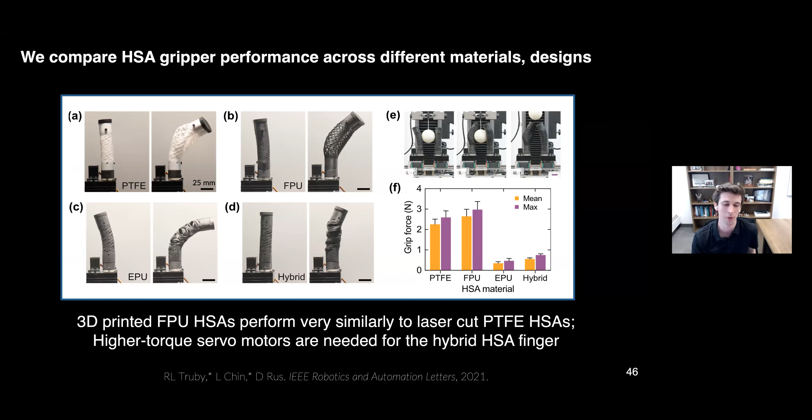I also want to point out that this was done in the middle of the pandemic, so we were working with pretty beat up servos, and we would love to go back and redo some of the servos to get good ones in there, not have the project disrupted by everything with COVID. So in short, we're able to 3D print these new types of architected materials.

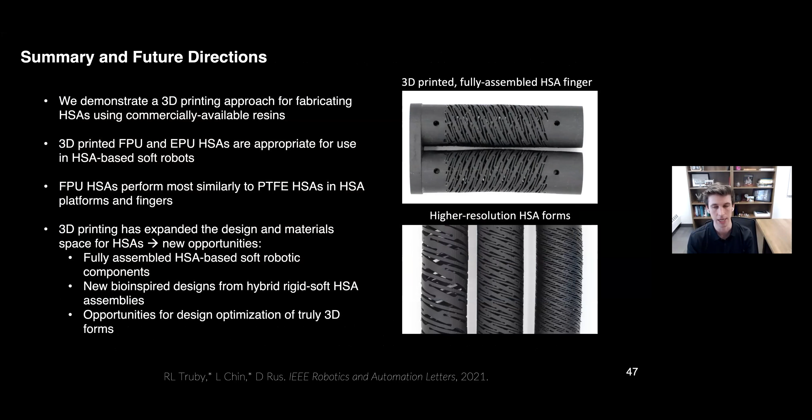We've really expanded the material space here, and we are very interested in building off this work, not only in designing the HSAs in new ways, but seeing these kinds of HSAs in new different types of soft robots.

I really want to get to the discussion, so I wanted to end with this slide showing my vision for where we want to go. By closing the performance gap between built and biological systems, we see soft materials having a role in helping us create new types of robots that can help in environmental and ecological stewardship applications. I'm very interested in domestic and assistive robots, as well as advancing the medical robotics space.

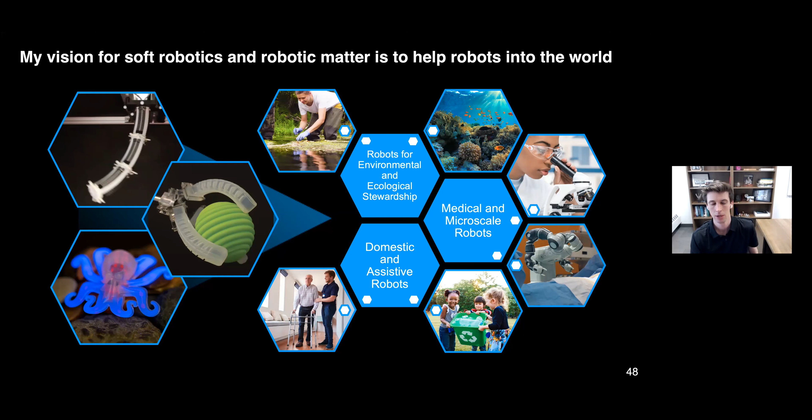This work was done with a number of people who are very dear to me. I'll give specific shout outs to my PhD and postdoc advisors, Jennifer Lewis and Daniela Rus, respectively. I'm very grateful for a number of organizations that have sponsored this work, namely the Wyss Institute and the Schmidt Science Fellows, which supported my postdoc.

With that, I know it was a whirlwind. I wanted to share a bit about this vision going forward and how we've explored what robotic materials might mean in the context of soft sensorized and architected materials. With that, I'm happy to take any questions, and I look forward to the discussion. Thank you all.

Thank you. Thank you so much for your great talk. Thanks.